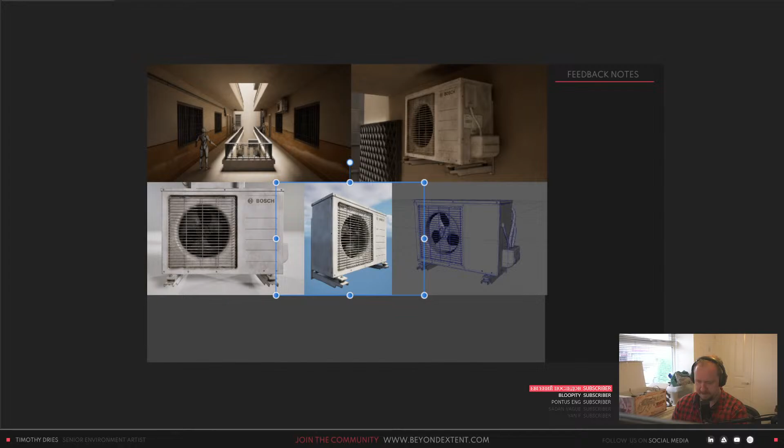We're gonna dive into all of this in just a second. Have you settled in yet, Tim?

So yeah, as I was explaining before, we are in the apartment, or the house that we're gonna be living in, right? So that's all settled. Just the current setup, the way that this is looking right now, is gonna change a little bit because now we're on the ground floor. We're gonna be moving up. I'm gonna move my whole setup basically to a separate room on the first floor, and we're gonna sort it all out there.

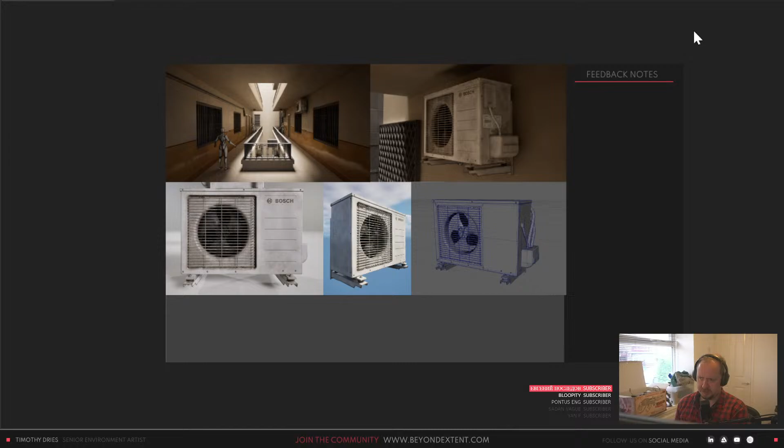So we're gonna see one more shift, but hopefully that should be minor and we don't have to rush it, because yeah, came home today, spent a couple of hours setting this janky setup up, making sure that everything still worked. Had some food, watched half of an episode of Fallout, and then I already started prep. So it's been pretty hectic today. But we got electricity, got water, we got hot water, we got gas, everything is working now. So happy with that. Hope that I didn't jinx any of it, but here we are.

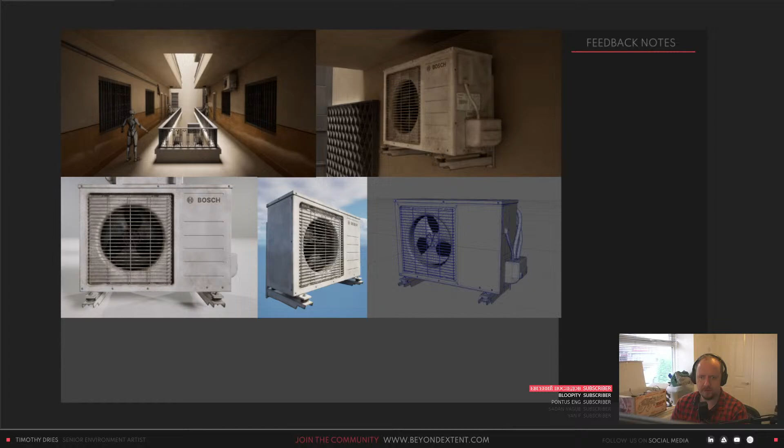Would love some thoughts on the current texture work and the amount of detail on the AC unit.

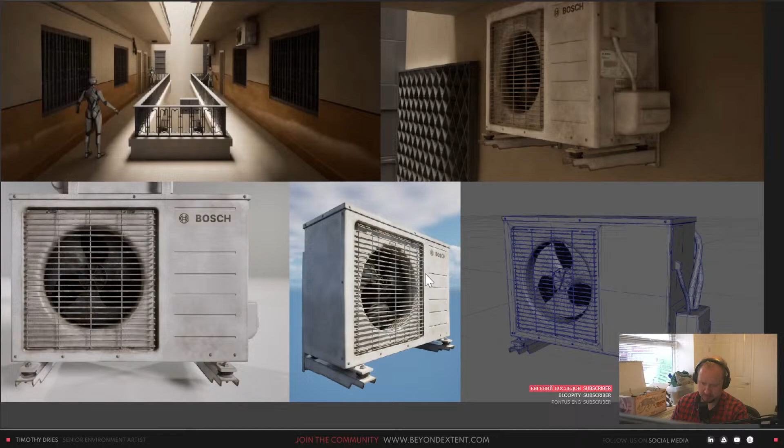Cool, so let's start there. Let's actually have a look at the other questions as well. So I bumped into some questions on how to tackle the fan blades and what's behind them. I get the feeling that I might need to include another layer of blades, but I'm not sure. Okay, we're gonna have a look into that as well. I didn't open any of the reference pictures that you added, but can definitely have a look into that. Yeah, because from the looks, it just looks like it's mostly black inside anyway.

Are there any topology red flags on the AC unit? And is it worth spending more time bringing the remaining details to the AC unit to showcase a prop for the portfolio? How far am I away from that quality level? That's a good question. And then lastly, any weirdness in the balcony hallway proportions since I updated them? Okay, so let's start there.

Let me bring up the reference again, so we can have a look and compare the two. Let's see, I'm just doing a quick check. The only thing that I can really see is that this section right now, so if I point it up here—hello, are we working? Yes. Over here. This section feels a bit too narrow now.

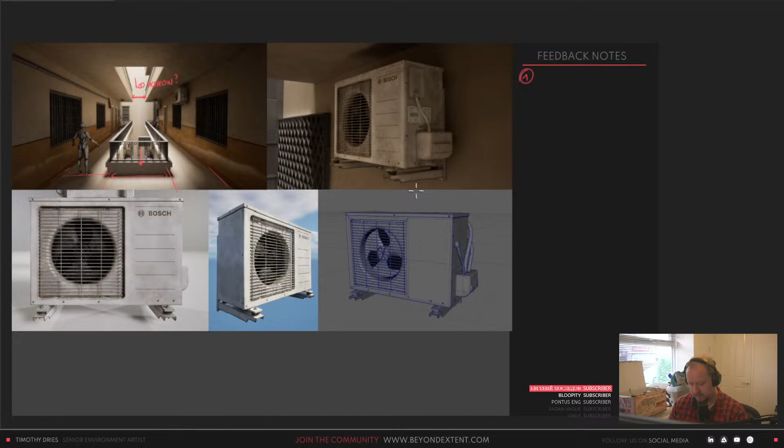Let's dive into the AC stuff now. The first one that I'll answer is how far off am I compared to the quality? So the quality question first. The best way to answer that is look on ArtStation and have a look at AC units that are already available on there, and use that as your quality benchmark.

The second question is kind of comparable to it as well. Is do I need to... wait, what was the specific wording? Because that's important here. Oh, I completely missed that you were frustrated with my situation as well and wishing me the best. Thanks so much, man, I appreciate it.

But is it worth spending more time bringing the remaining details to the AC unit to showcase a prop for the portfolio? Is it worth it? It just depends on how far you want to go with it. It could be worth it, it could be nice, but it could also be nice to just have it simplified in detail, and then do a prop that's just standalone, by itself, as a new portfolio piece as well.

That could also be worth it too. I think it just depends on how you're looking at showcasing things. Because if you want to have it very clearly divided, it's probably the best way to do it, where you have a clear separation between, hey, this is my environment and this is my prop.

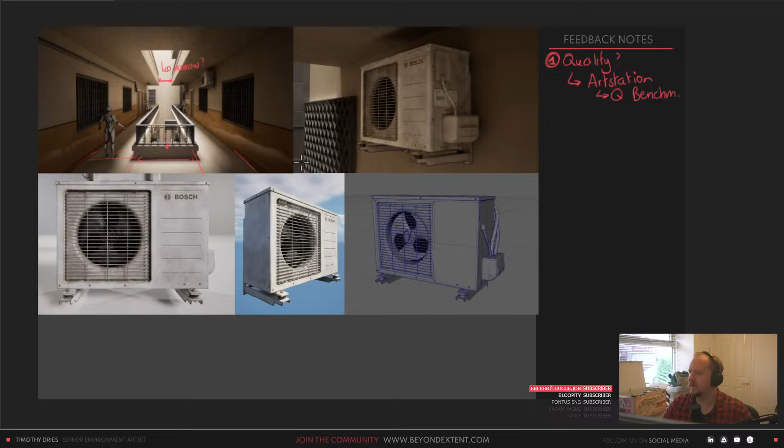But yeah, as I was saying, whether or not you should separate the two out, environment and prop, that is somewhat up to you. You could also do it where you have the environment showcase and the prop showcase, but they're technically the same post. I'm not sure, oh, this is a tricky one. I'm not sure if I would recommend that.

So I'll make it simple, right? Do you want to take it all the way? If the answer to that question is yes, do it. If it's no, then do a separated prop. Let's really simplify this and turn it into what you want to do. Make it very clear cut, because you don't need to. So it just depends on what you want to do with it.

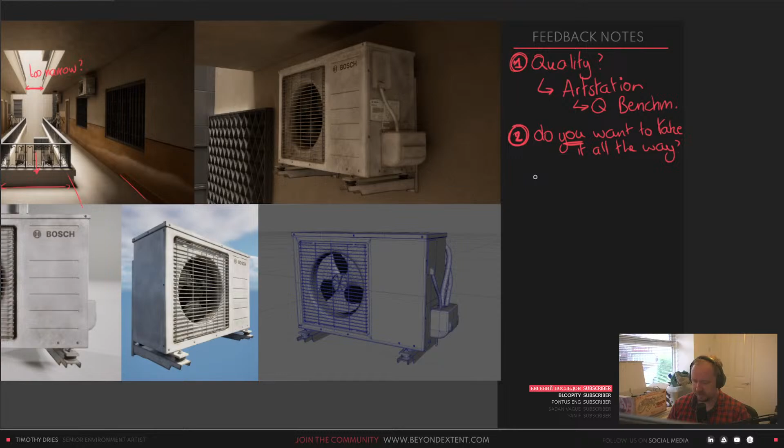And then we'll have a look at the current texture work and the amount of detail on the AC.

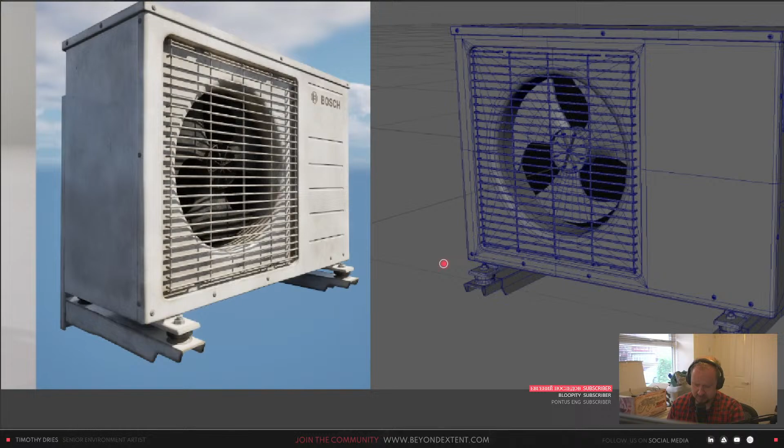Let's see. So I think the geometry is actually really good. You've decided to model the bolts in, which, take it or leave it, I don't mind, especially because you're going for a little bit more high fidelity. So the modeling is fine, right? So the modeling is great.

What can be improved a lot is just the texturing. The texturing feels at the moment a little too generic. It feels like it doesn't really have anything to say about the prop. It doesn't really add to the prop itself. It just feels like a generic kind of dirt layered on top of it, where you can do so much more with it.

For example, if you look at the reference actually that I didn't include, but I'll snip one for you all. So we're going to have a quick look at the reference here.

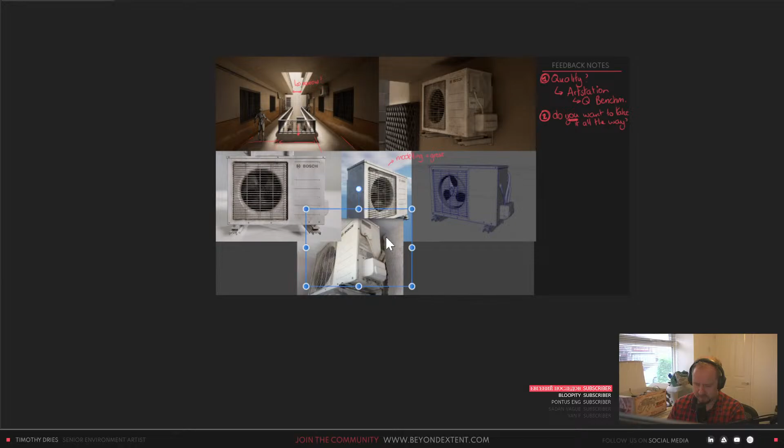Right, so if you look at this reference, even on the modeling side, let's start there, where you can still make some improvements to the model. It's all this kind of stuff where you see small deviations in the topology. Pick a couple of places and add a little kink in this panel, for example, and think about the actual connection bits and how it's put together.

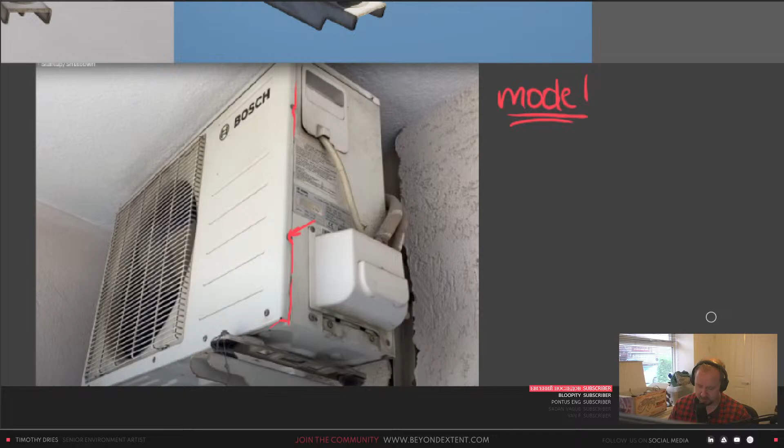So wherever you have a bolt, that's going to mean there's going to be pressure applied to this, which is then going to bend ever so slightly this little panel here. So instead of being straight, you're going to have a little inset there. I'm over-exaggerating it, but those subtle details are really going to make a huge difference as well. And then when it comes to the side, because this is not fastened that hard, you can exaggerate the way that this is going to curve out a little bit.

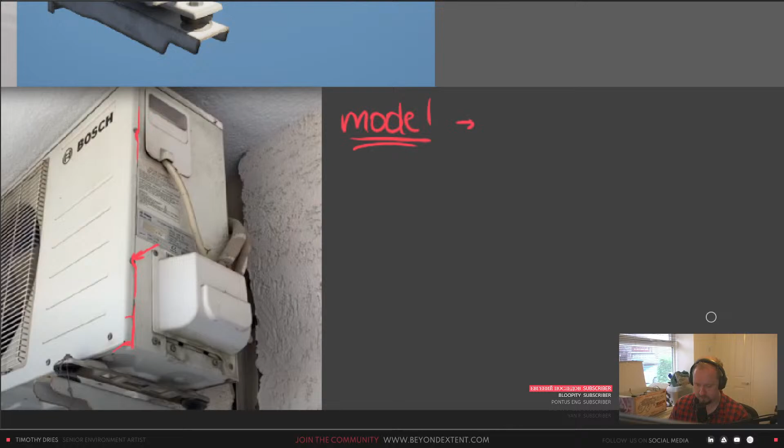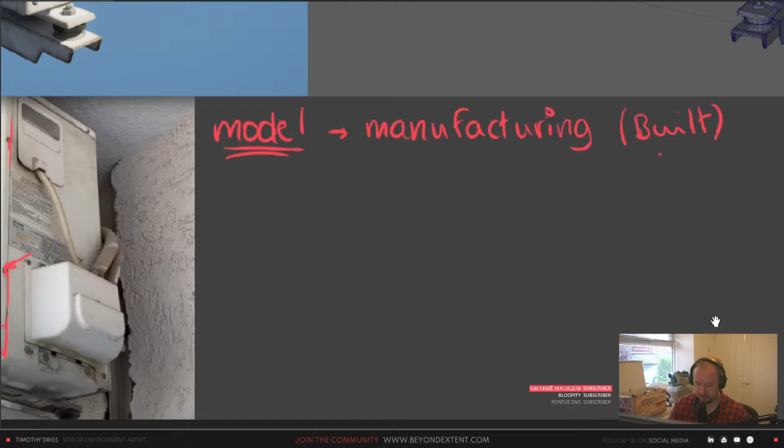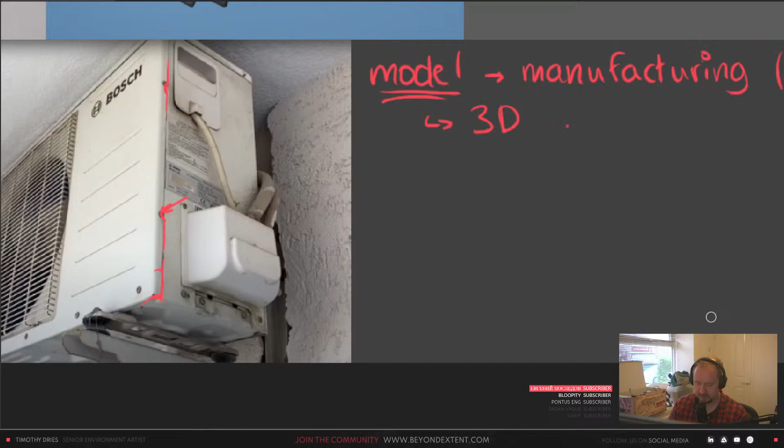So it basically comes down to thinking about your manufacturing. I bring this up a lot. Think about how it's built, and try to find those little details that make it shine. And in general, what we try to do is whenever something is looking 3D, that means it's too straight. So the way we counteract that is just to make it less so.

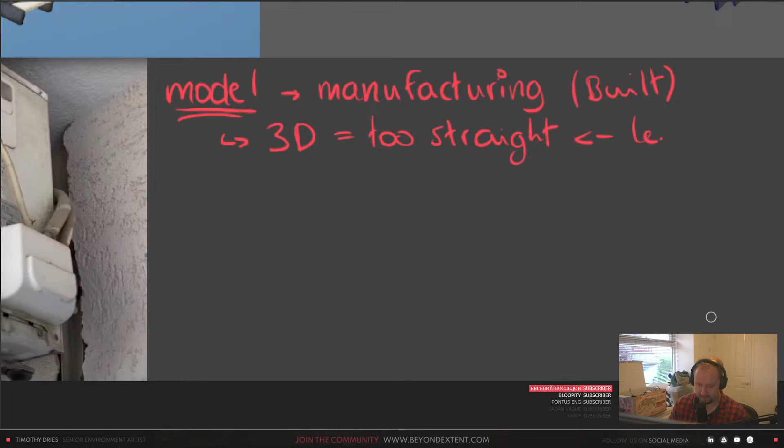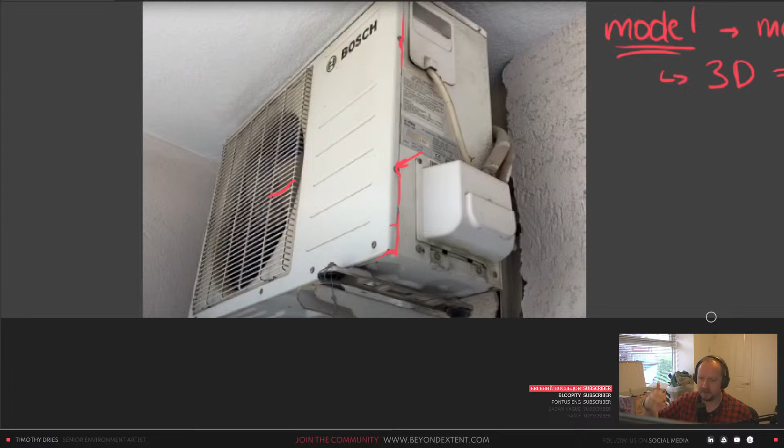Right? And we can pick a couple of spots. For example, this massive grid here. If you just pick one section and make it a little bit crooked, right? That's already going to give a lot of character, because you can imagine that someone, I don't know, jabbed a screwdriver in there to do some shitty repair job or something like that, right? It gives character to the whole thing.

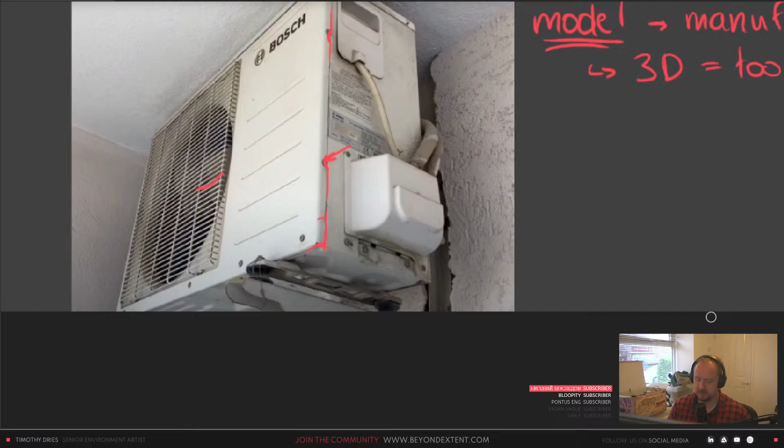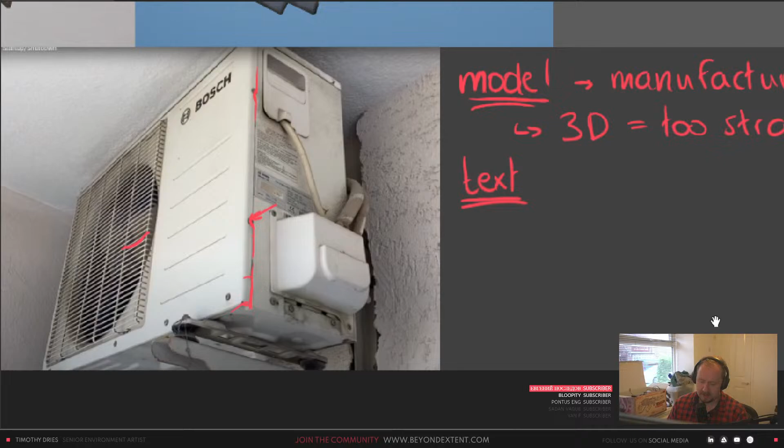So think about those opportunities. Same with the bolts as well, right? Where it forces the panel in. Think about that. Now, when it comes to the texturing, you can also have the same look here, right? You can see that the front panel is actually pretty clean, because this is a pretty easy surface to clean, right? Pretty even, so there's not going to be too much dirt,

and it's going to be fairly minimal, right? However, if we compare that to the grid here, there's going to be lots of dirt, because this is freaking annoying to clean, right? No one's really going to bother with that. They're not going to take a brush and go through all the little bits. They're not going to detach the grid either. So you can see that the back of the panel, in comparison to the main panel, is just way dirtier because of that reason, right? It's harder to clean.

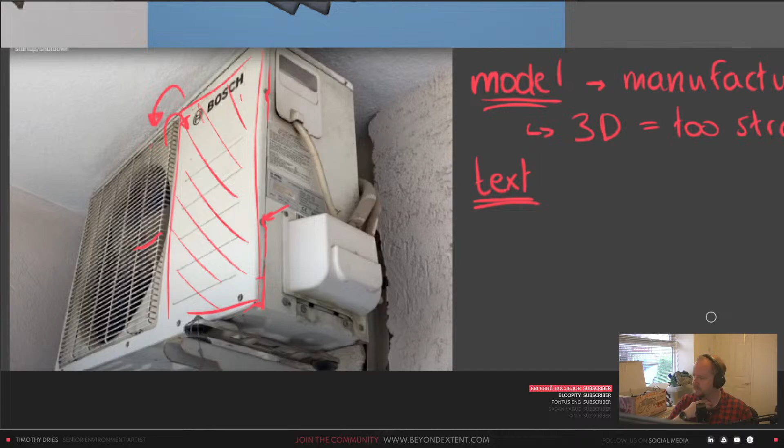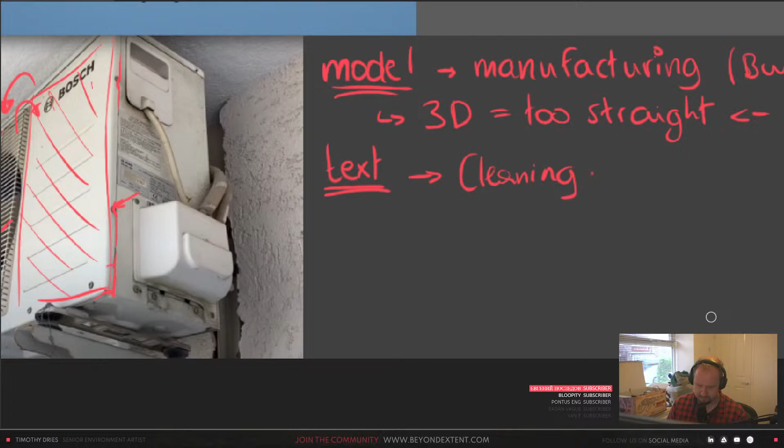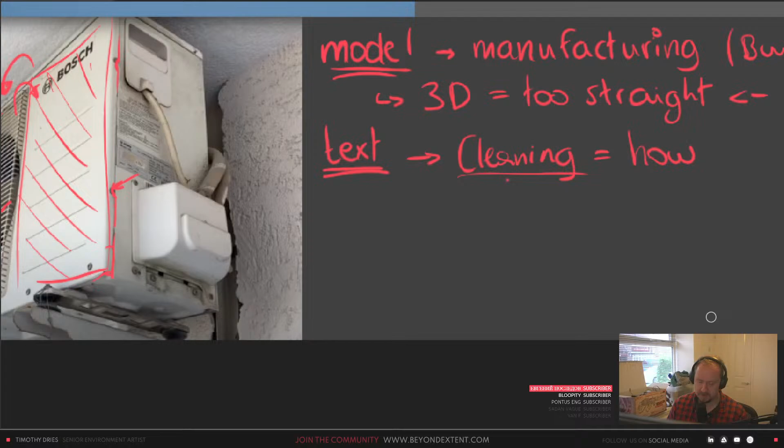So again, think about how you would clean something like this. Right? And where and how you would clean. You could do cleaning or repair, right? You can use those as the same kind of reasoning that you're using for your manufacturing. You can get the same sort of layering from your cleaning, right? Or from the environment as well.

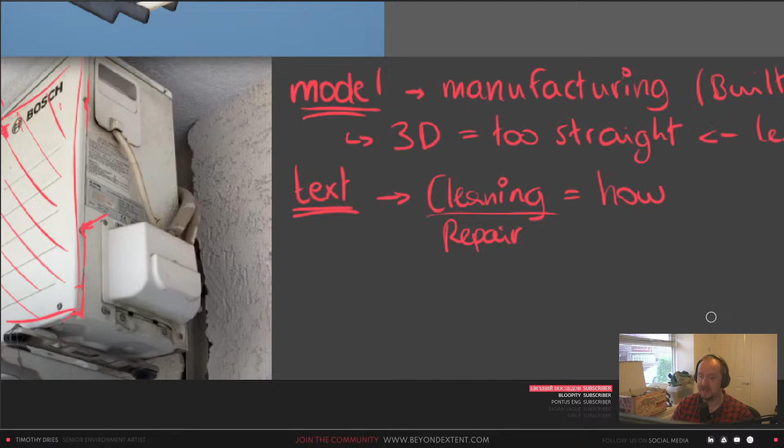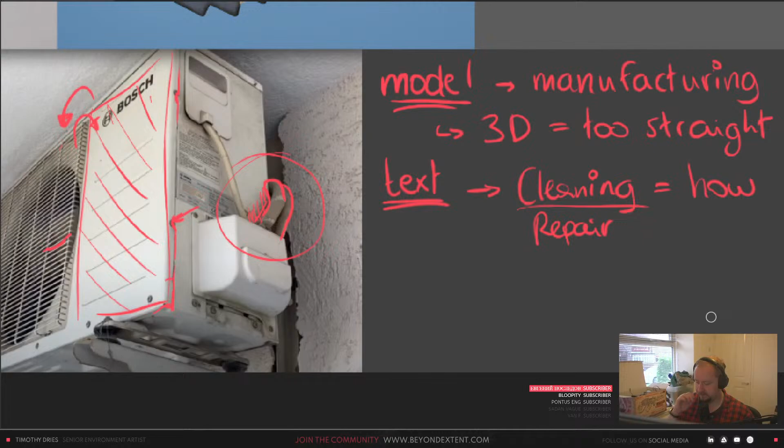So for example, if you live in a very sandy environment, you're gonna have sand gathering on top, in the crevices, all that kind of stuff, right? If you live in a very dusty environment, the same is gonna happen, but in a different way, right? Because sand and dust move around and gather in a different way too. So try to emphasize those little bits where, hey, look, these cables are in the way of me cleaning behind them. So you're gonna see dust and dirt build up behind the cables rather than on the big panels, right? Try to make it contextual.

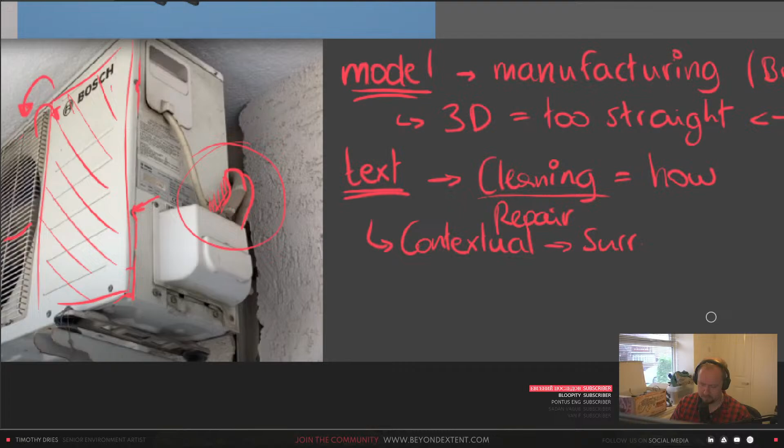Contextual to its surroundings. And also how people handle it too. And this basically comes down to cleaning and repair, right? So you got the handling of things; if you look at those, it's basically the same thing. How someone is going to handle an object like this is going to indicate where it's going to be cleaned or repaired, all that kind of stuff. So yeah, pretty broad overview, but I think that can get you along a lot, right? So you already have an okay baseline.

Again, the separation between this panel, right? Let's make it really apparent. And this panel, there needs to be a way more solid difference between the two. And then also contact sections, right? So for example, where this comes in contact with the brace, you can have all sorts of things, right? Scratches if you're staying pretty new, but that can go to peeled paint, even rust after a certain point, right? Depending on the age of the object, how much it has been moved around and how long it has been used, all that kind of stuff.

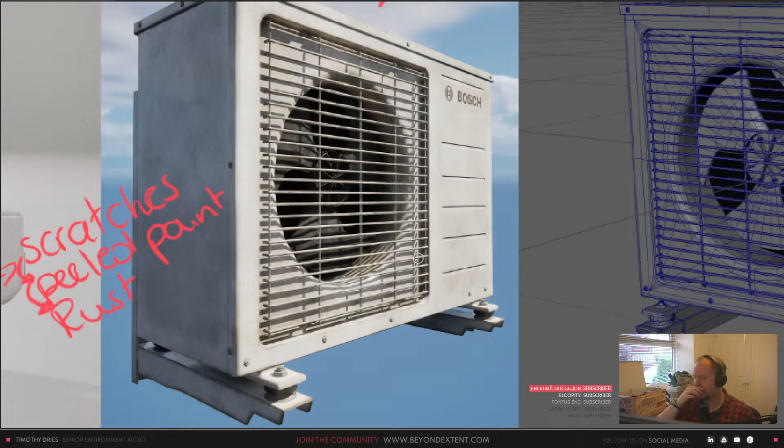And then there were two more questions, right? So the first one was the blades. What do we do with them? I think you already have a good approach, right? I can't really see too far in the distance, but that's basically the generic approach: just make the back of it black where you can't see it. I think it's already doing a really good job, because no one's gonna inspect it with a flashlight and shine a light into it, right? So you don't have to be worried about that.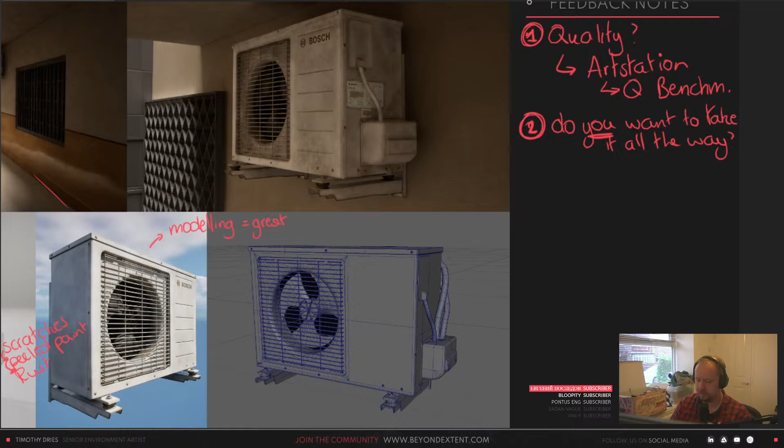Especially think about it contextually too, right? Where it is gonna be in a darker spot, so that's gonna add to how dark the interior is gonna be as well. So honestly I think you're on a good track when it comes to selling the visibility of the blades. And then last but not least, we're going to talk about the topology. I don't think there's going to be too much to talk about, but let's have a look anyway.

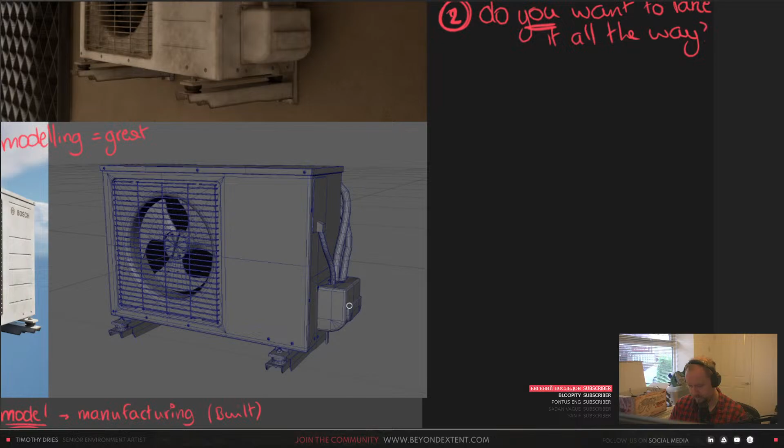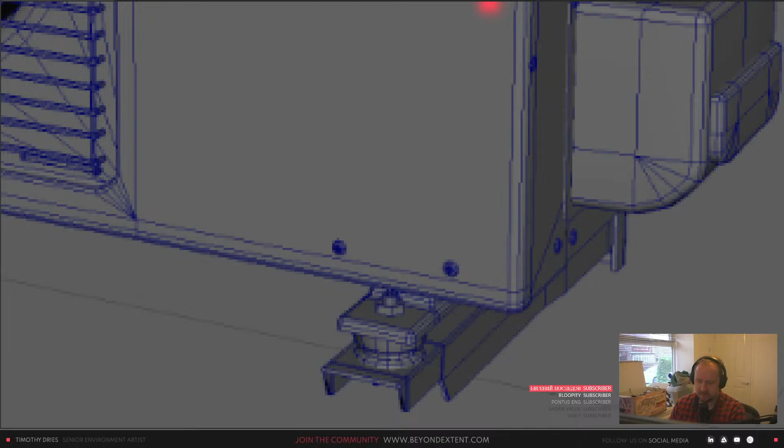Like I said, the bolts add a lot of topology. I can't see it well on this screenshot, but the bolts can definitely be reduced way down. I think they're still way too dense for what they add to the whole object. You can really simplify them down. You don't even need to have the top ring on it - you can just make it flat because it doesn't contribute a lot to the silhouette of the object anyway.

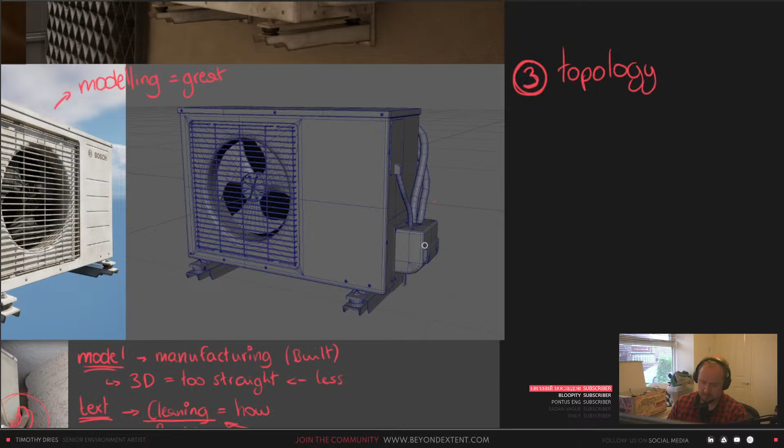The topology, and generally the way that I try to think about this - there's obviously exceptions to the rule - but let's say you have a bevel like this with 4 edges. That sort of density, I'll try to keep as consistent as possible. So if you're adding something like this, I would try to have it 6-sided, so that you get the shape but you're not adding too much. Maybe 6, 8, possibly 12. I wouldn't really go for 12, just keep it really low down, because the radial topology is actually a lot as well.

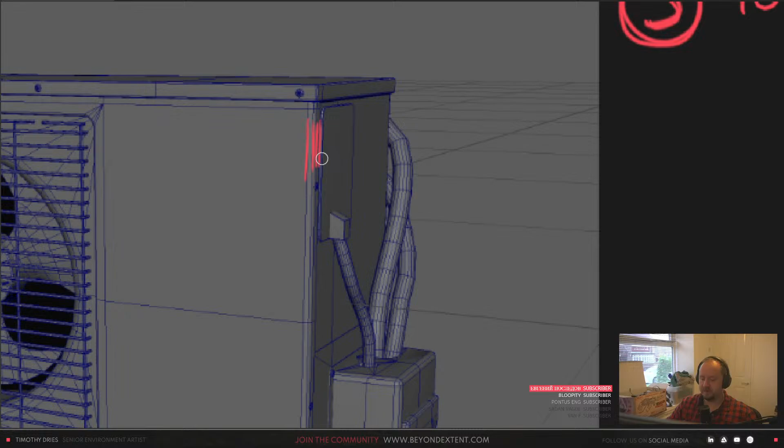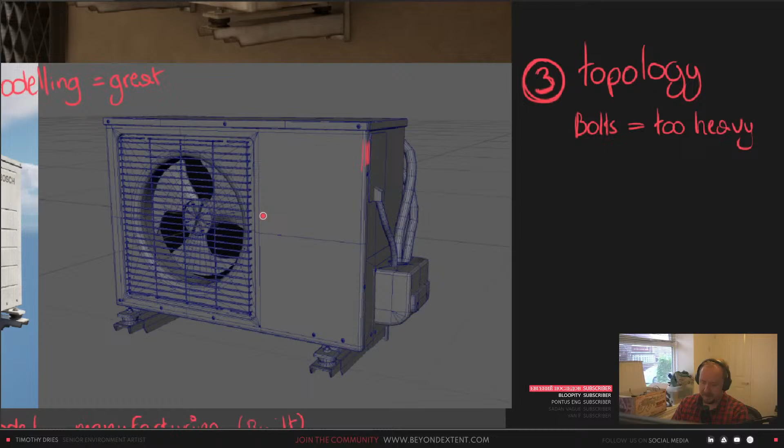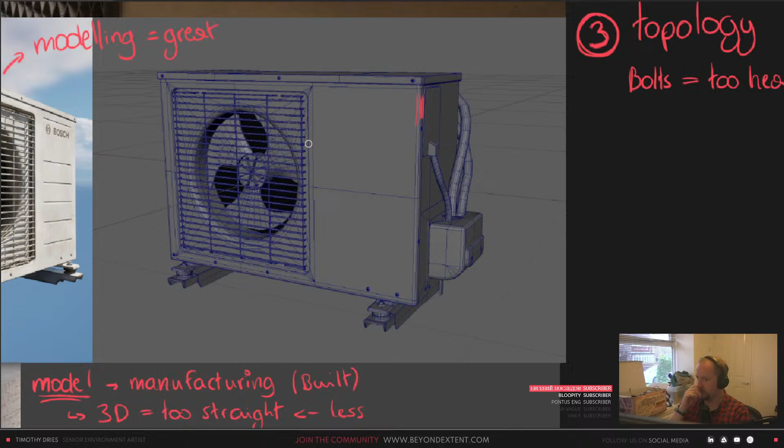The bolts are too heavy, like you said as well. Because this is the thing - when it comes to assets like this, it's more about the outliers and the exceptions to the whole rather than the whole thing by itself. I can see that you did pretty well with your topology in general - you only have it where it really matters, for the most part.

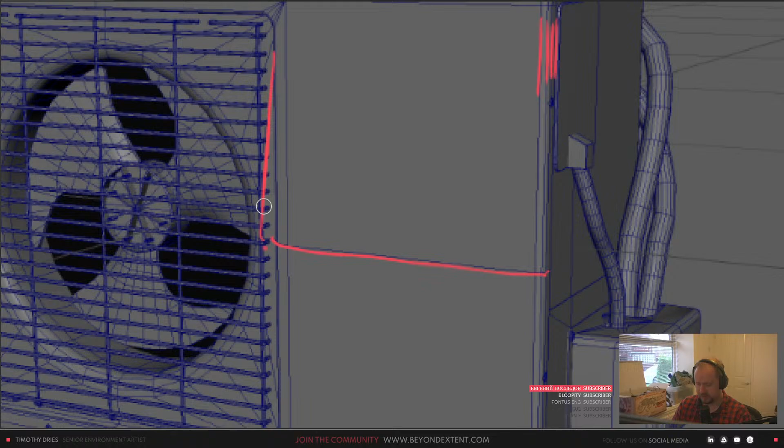Yeah, this one is kind of annoying. Instead of having this thing that cuts all the way through, you could also just map it to here, even though those are annoying triangles. It's just wasteful because it goes through all these surfaces - it doesn't need to be like that. So this one can be removed as well.

Is this music? I haven't heard this. It's all the way down. No wonder I haven't heard it.

Weighted normal technique so that you wouldn't need to add that many bevels. You could, but that's also not going to hold up to scrutiny when it comes to really up close stuff. I think if you want to have it up close, it's better to go for a couple more bevels, especially for a high quality prop.

Maybe use that for the bend and the warp. If you're talking about this edge, that bending and warping is not going to be enough with just a single edge. You're probably going to need more than that, and I would make them contextual to where you're going to add them. With all the stuff we said before, you're going to have to add more edges to the whole thing, but as long as they're contextual to the warping and you try to condense them where possible, then we're in a good spot.

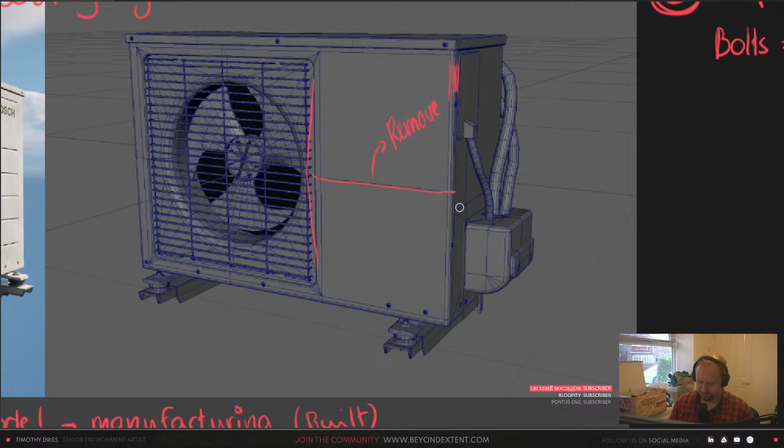When it comes to geometry here as well, you can really optimize this cable. In terms of the circular loops, you can easily cut that down to like 8 or something like that. You can potentially do the same thing here, but with these I'm more worried about how segmenty certain areas are going to feel. Try to make these contextual to where most of the warping is going to be - because now you have a nice equal division in the pipe, but you actually want more divisions here to make this nice and smooth, and less divisions where there's going to be a straighter section. For example, you could cut these out entirely because this section is mostly straight anyway. So again, make it contextual, and do that on all the pipes, and then you're good.

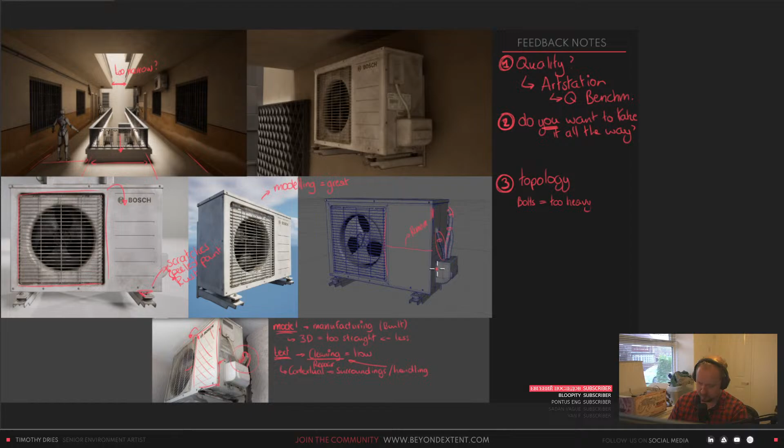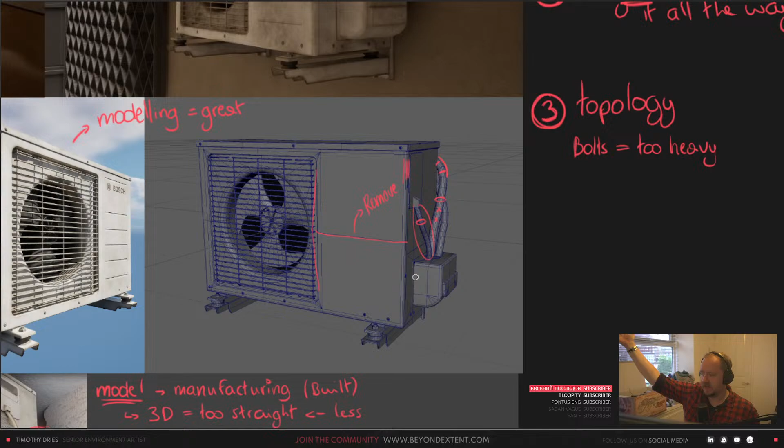It's been a while since I used it. There's all kinds of neat tricks - one tool that I love, it's from Maya but I have it in Blender as well, called Edit Edge Flow. You basically select 2 edges, add a new edge, do Edit Edge Flow, and it makes it into a nice and smooth surface.

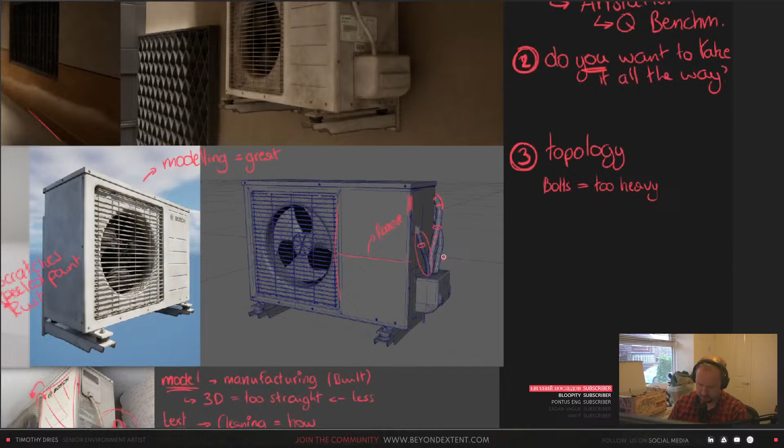That's gonna be nice. Yeah, there's definitely some optimization needed, but I would say overall pretty good job on the whole thing - really thinking about geometry, trying to make all of it nice and clean, not working with a lot of triangles, pretty good topology overall. So mostly the bolts and the cables, because they always consume a lot of the poly budget anyway.

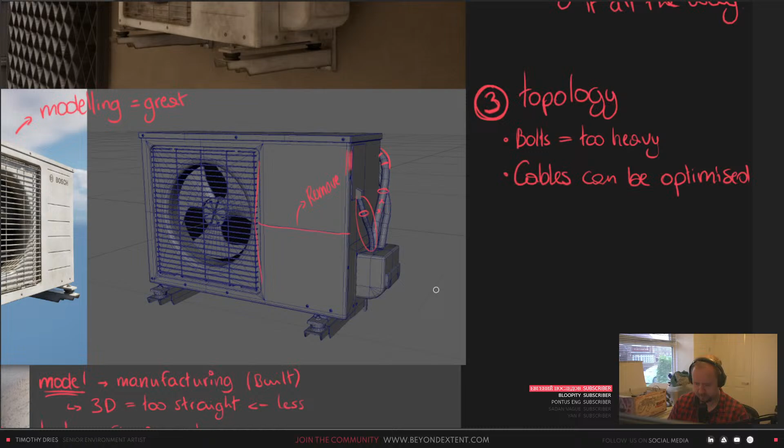For the most part, that's it. And then basically what you're gonna win with these two, spend that on giving the prop character. That's basically what I would do. Right, so you're just transferring all the gains that you had to adding more geo to where it matters, and you can add those nice little bits of wonkiness.

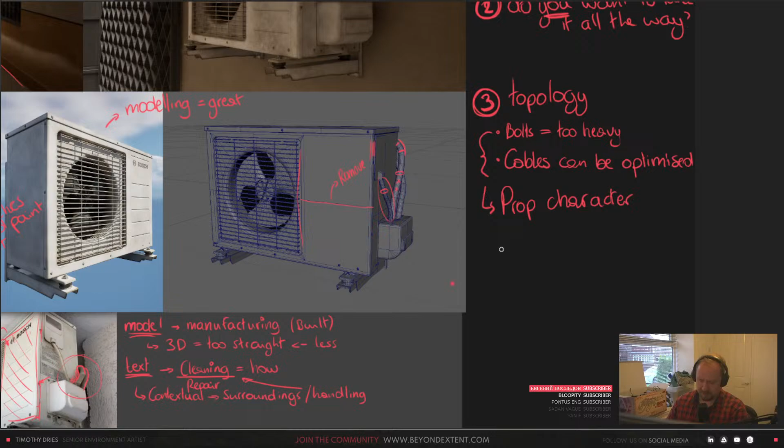But I think this is it. This is it, Ryan. Really good work so far. I love the amount of details that you're putting into it too. Again, nice attention to the topology as well. That's definitely going to pay off too. So, yeah. Great work.

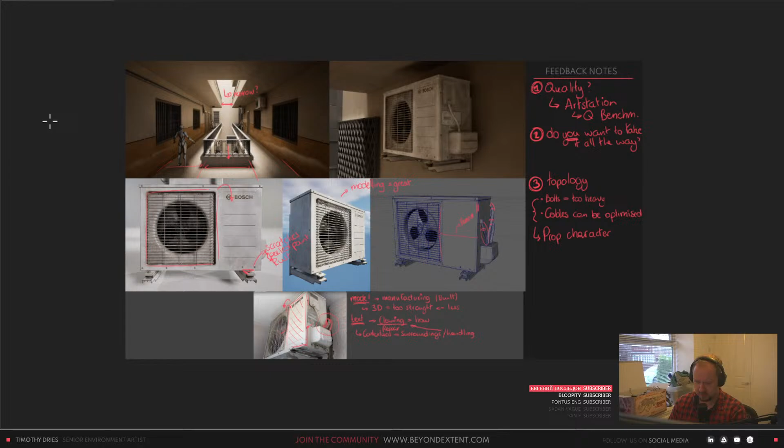Akmal is asking a question. So, can you tell me about your views on technical artists in game environment creation? Any insights on what they do? So, technical artists, if we want to simplify it, they basically do everything that the other disciplines can't do. Which I know, there's a lot of it. But even within technical art, you have people that specify on tools or in... What are some of the big ones? I think tools, optimization... I would call those two the big buckets. Tools and optimizations. Because they're really broad by themselves, right? So yeah, it's a really broad category.

Yeah, but they basically help build a bridge between artists and all the things that they have to do in their workflow, in their day-to-day life, and a technical artist can basically come in and build tools for them, right? So, for example, if I'm struggling with a certain workflow, a technical artist can come in and say, hey, I have a solution for this, and then build a tool to help us improve that workflow.